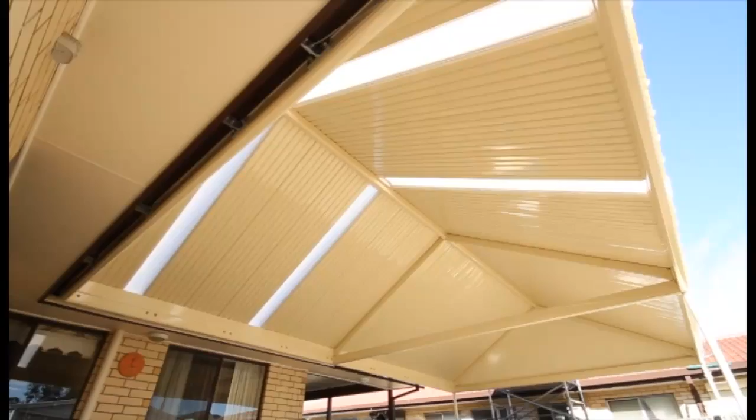The Stratco Outback is a complete portfolio of products that are tailored to your individual needs. Whether for entertaining, an area for children to play, or all year-round weather protection, a Stratco Outback will improve your lifestyle and the value of your home. This DVD provides assistance to help you install your Stratco Outback Clearspan gable with the fundamental information and some handy hints to help you along the way.

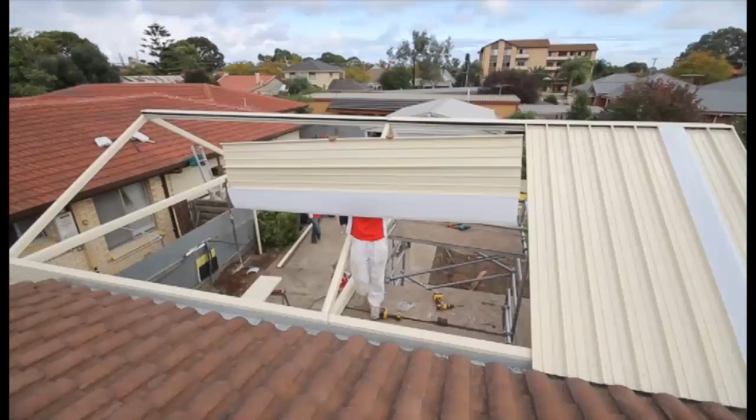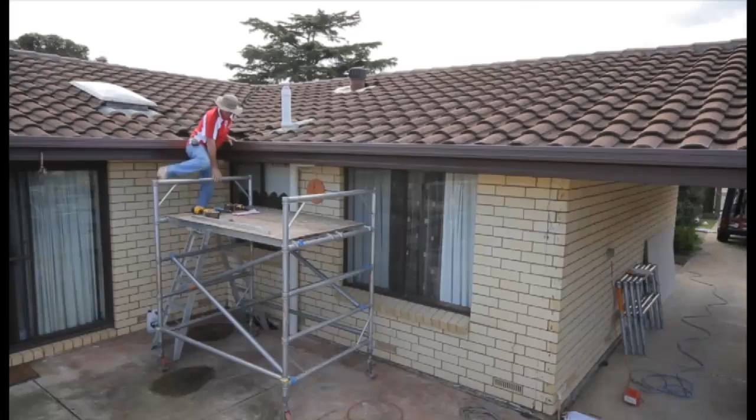Before you start, it's important to check with your local government authority prior to the installation of your Stratco Outback. It is the builder's responsibility to ensure any structure to which the Outback is being attached is capable of withstanding the additional loads and, if necessary, is adequately reinforced. This includes existing concrete to which the Outback is being attached.

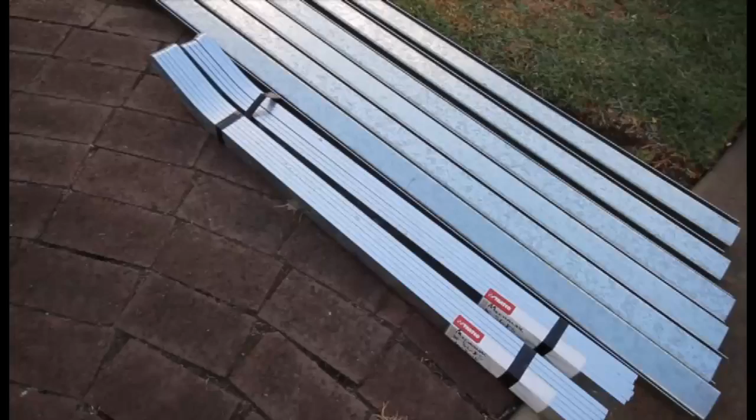Watch this DVD and read the installation guide in their entirety before starting your project, and refer to them constantly during construction. Lay out the components in order of assembly on the ground and check them against the delivery note to ensure you're familiar with them and ensure you have all the necessary tools.

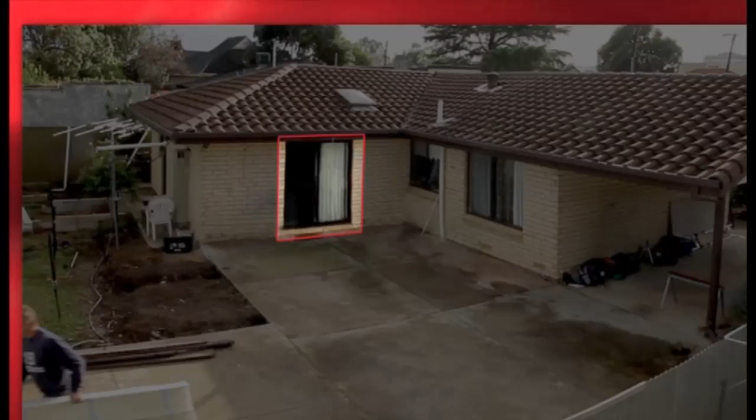Refer to your drawing of the Outback and house showing all measurements. Mark out the overall area of the Outback and ensure it's free from obstructions. Beam-to-wall connections can cause difficulty if they coincide with window or door openings, so try to avoid these in your design. Ensure there is reasonable access for materials and working space, and consider the disposal of runoff water.

Check post and beam positions on the ground and check for square by measuring diagonals. If attaching to a corner of a house, also check the existing structure for square.

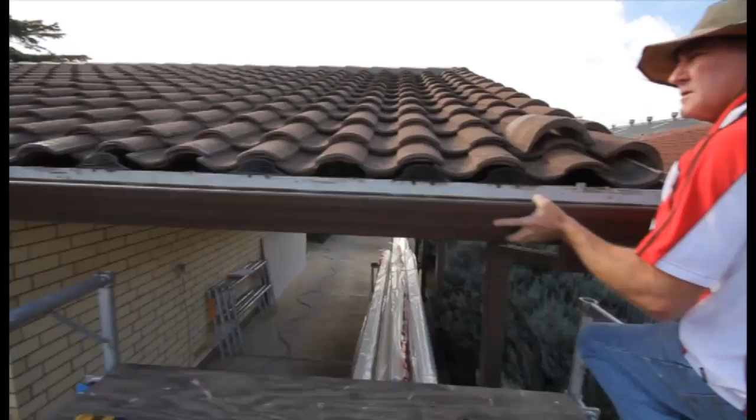Box gutter installation. Remove the existing house gutter where the box gutter will be installed. Consider how and where the box gutter will join to your existing house gutter and downpipe. Cut the box gutter and join to existing house gutter.

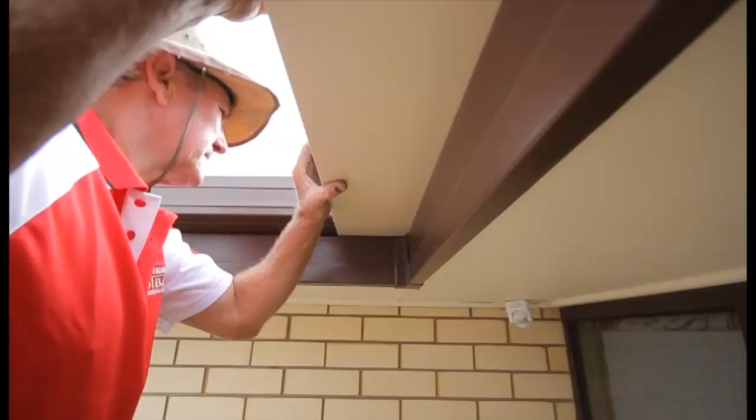Fix in place above your rafter strengthening brackets, joining it to existing house gutter and fascia. Measure the remaining length for the box gutter and cut. Seal all joins and rivets with silicone.

Rafter strengthening brackets. Rafter strengthening brackets need to be installed at maximum 1200 mm spacing. Prior to ordering the material, you should lift your existing house roof and locate your house rafters. Whilst there are several options for strengthening rafters, the recommended method is Stratco's adjustable rafter strengthening bracket.

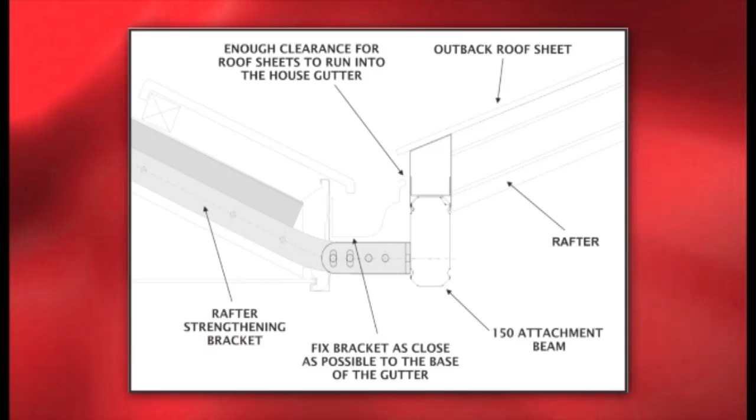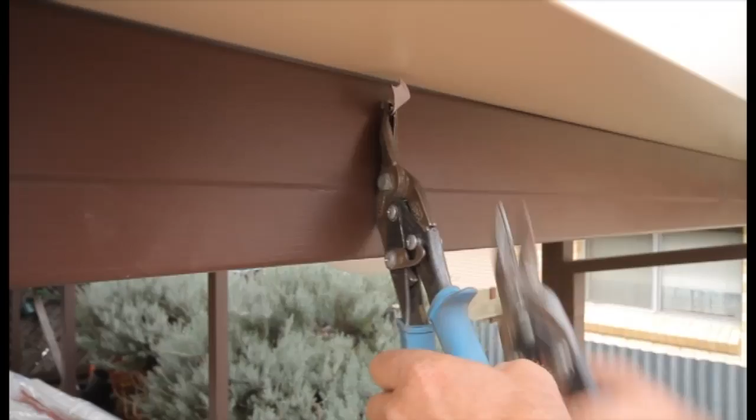The adjustable rafter strengthening bracket allows a greater distance between the house fascia and the Outback attachment beam to facilitate the installation of a box gutter. It consists of two pieces, the long arm and the T-piece. Cut a hole in the house fascia to allow the long arm of the bracket to protrude through. Slide the bracket through the fascia and position alongside the house rafters.

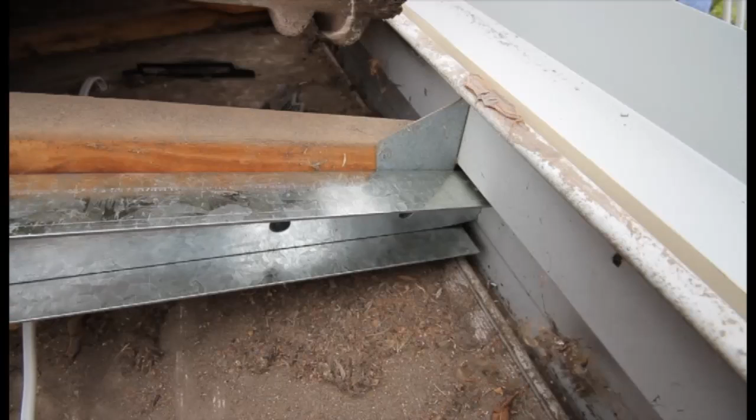To provide additional strength, a reinforcing channel may also be required on the opposite side of the rafter or on both sides. The reinforcing channel should extend to at least 1800 mm beyond the bird's mouth of the rafter and/or 300 mm past the web overhang of your house rafter. Bolt the long arm of the bracket to your house rafter using a minimum of 6 M12 bolts. These are not included in the standard Stratco Outback kit.

Fit the bracket as close to the bottom of your house gutter or box gutter as possible. Ensure the bolts go through the bracket, rafter and reinforcing channel if required. Contact Stratco for more information on steel framing reinforcement and attachment methods.

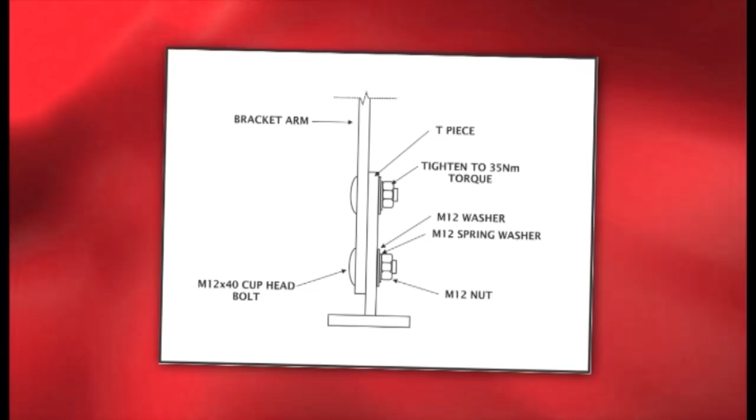Bolt the T-piece of the bracket to the long arm at the desired location. Ensure the front face of the bracket is vertical and is at the desired distance from the house fascia. As it is critical all brackets are even, run a string line to align the brackets. In the case of a corner attached unit, if the house is not square, this can be corrected by adjusting the brackets accordingly. Once rafter strengthening brackets are fixed, the Outback attachment beam can be prepared and then bolted in place.

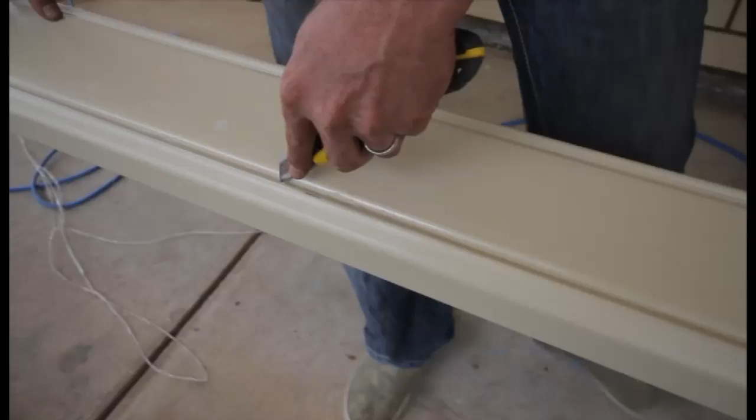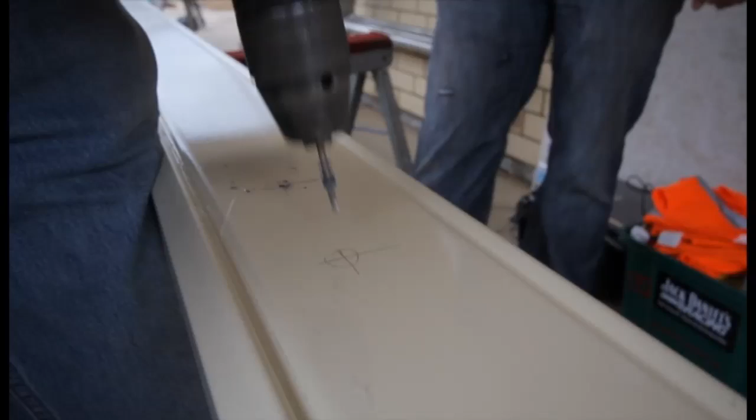Attachment beam preparation. Mark the desired hole locations. Drill a pilot hole and then a 10 mm hole right through the Outback beam in the same location. Then drill a 13 mm hole right through the Outback beam in the same location. Gradually widening the hole will ensure they will stay even either side.

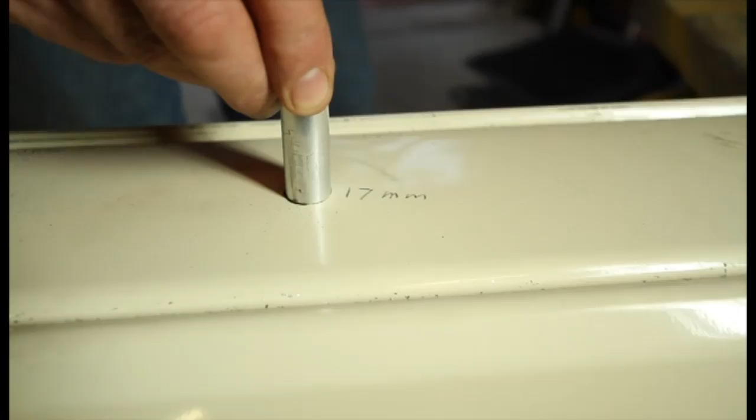Turn the beam over and drill a 17 mm hole on the inside face to allow for the insertion of the spacer. The spacer minimises any potential crushing of the beam when bolts are tightened. Remove any swarf. Attach the Clearspan beam capping to all side attachment beams before bolting it in place. End attachment beams do not require the beam capping.

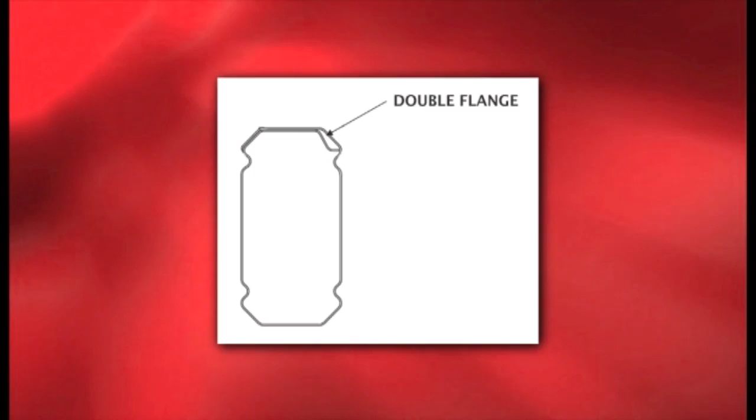Ensure the double thickness is at the top and the seam faces the house and the roof sheets will clear either the existing house gutter or box gutter. If a cover flashing is being installed to conceal the rafter strengthening brackets, it's preferable to line the bottom of the attachment beam up with the bottom of the house fascia, provided this allows water runoff into the house gutter or box gutter.

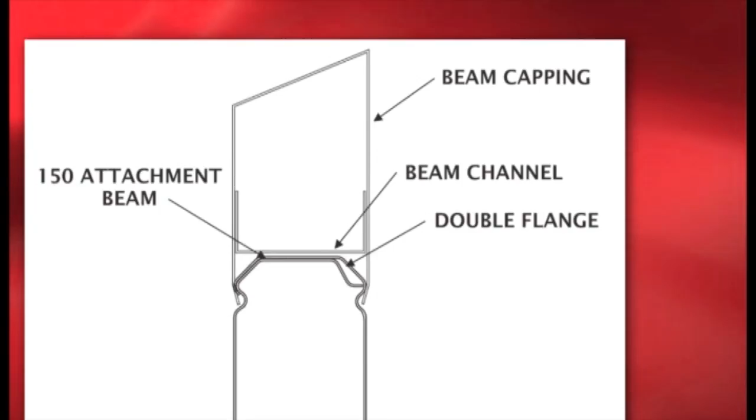Clearspan beam capping. Side beams or valley beams of Clearspan gables have a capping attached to them to provide additional strength and height. Measure the inside section and cut to length if required. Ensure that the two sides of the inside section remain flush with the faces of the beam.

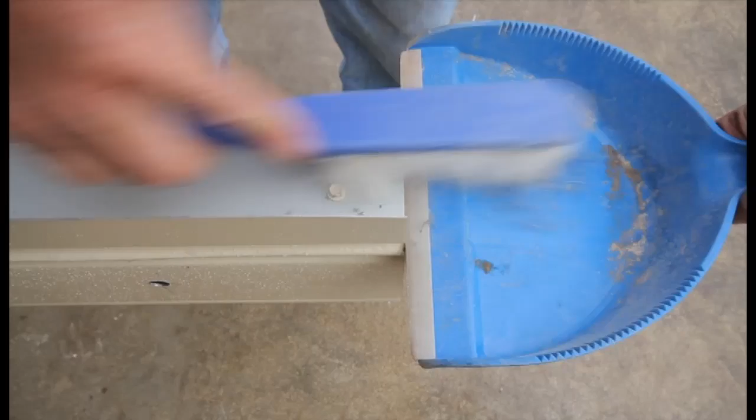Screw the inside section to the top of the beam with 12x20 self-drilling screws every 500 mm and no further than 100 mm from the end. Multiple lengths, if required, are butt joined. Remove any swarf. Measure the outside section and cut to length if required.

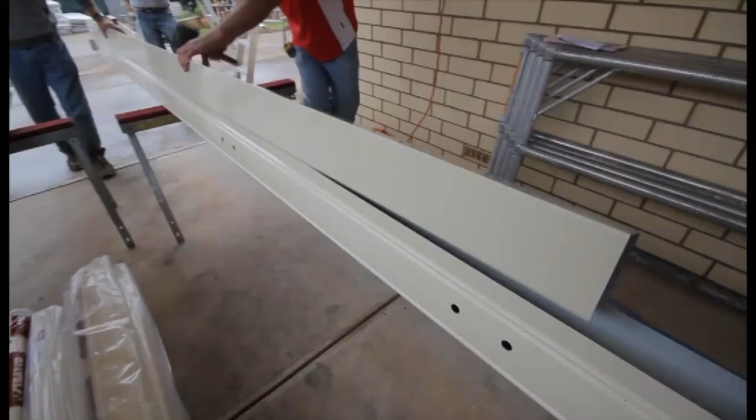Clip the outside section over the inside section at one end, ensuring the return fold sits inside the top flute of the beam, and fix with one self-drilling screw. Work along the length of the beam capping, gradually clipping the outside section over the inside section. The return folds on the bottom of the outside section nestle into the top flute of the Outback beam.

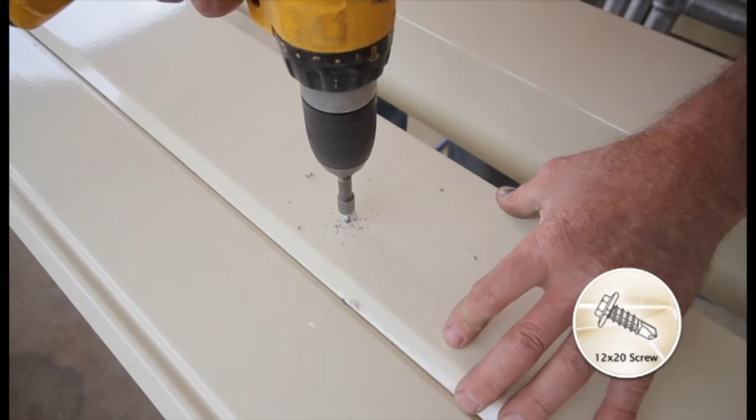Fix the outside section to the inside section using 3 mm rivets or 12x20 self-drilling screws every 500 mm. It will be necessary to notch the beam capping where other beams are connecting.

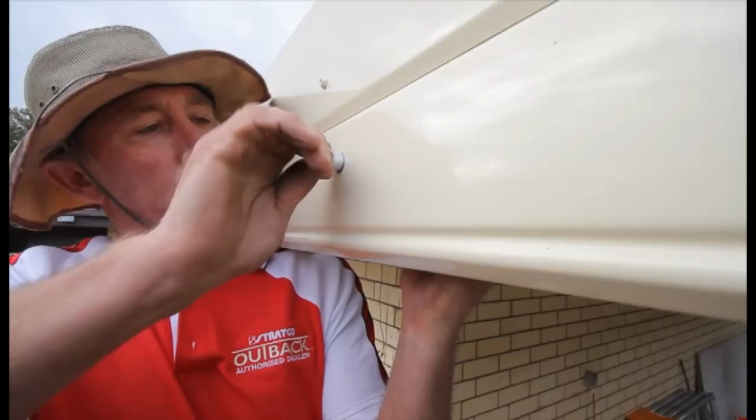Attachment beam installation. Lift the beam into place and insert spacer and bolt into attachment beam, and connect to rafter strengthening brackets, ensuring the bolt head and spring washer is on the inside face of the attachment beam. Hand tighten all bolts. Then, once all are in place, tighten but do not over-tighten bolts to avoid crushing the beam.

Where attachment beams are being joined to other perimeter beams, install a beam-to-beam bracket, and where posts are positioned, install a post-to-beam bracket.

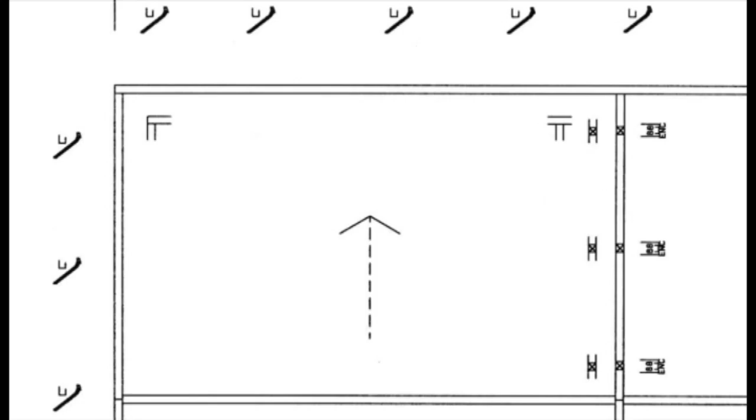Perimeter framework. Refer to the drawing to determine the orientation in which beams are being attached to each other and column location. Ensure the double thickness of the beams is to the top. Locate the beam-to-beam bracket on the inside face of the receiving beam where the beams will meet. Align the top of the bracket inside the top flute of the beam.

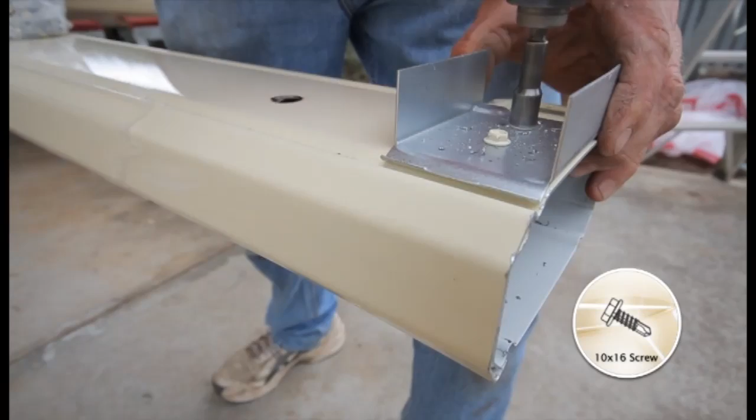Place a beam filler in the recess of the bracket and fix in place with two 10x16 self-drilling screws. If a column is to be connected below a beam-to-beam connection, use a notched beam filler and post-to-beam bracket. Slide the joining beam over the bracket and fix in place with two 10x16 self-drilling screws either side.

A post-to-beam bracket simply clips into place. Fix post-to-beam bracket with two 10x25 countersunk self-drilling screws each side. Where posts are located at a beam-to-beam junction, install both beam-to-beam and post-to-beam bracket with a notched beam filler. Repeat this process for all attachment beam, valley beam junctions and column locations until perimeter framework is completed.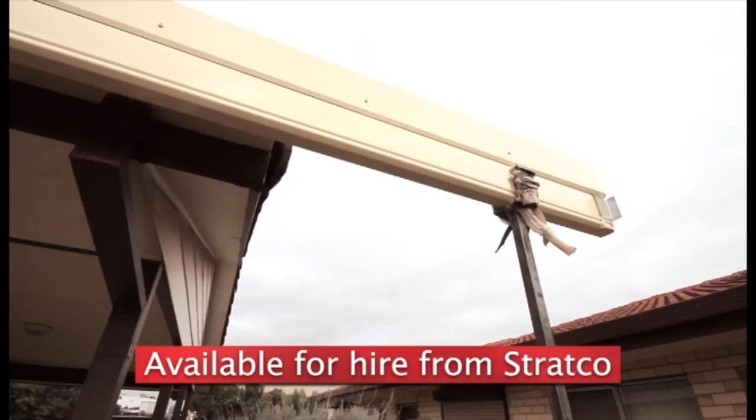A beam end cap is simply pushed into place to conceal the exposed ends of the beams. Be sure to use construction props during the framework installation to hold the framework in place and ensure they have a stable footing. Once all framework is installed, check for square by checking the diagonal measurements.

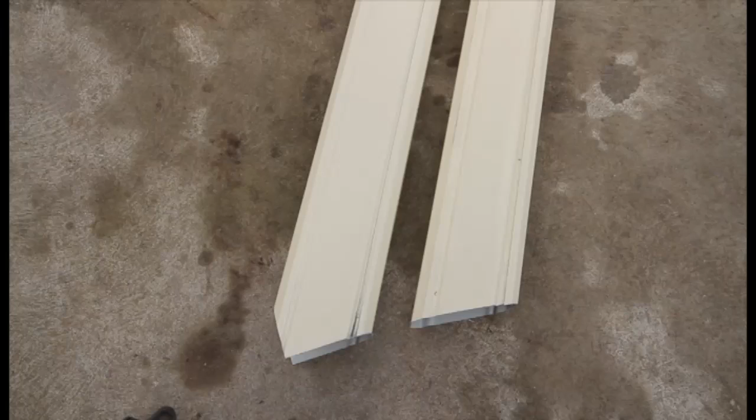Gable rafter installation. Gable rafters are supplied pre-cut to the required pitch and length. Identify the correct rafters using the cut detail at the base of the rafter. Intermediate rafters and rafters placed at the end of the structure with no header beam have a plumb cut, and rafters placed onto a header beam have a corner cut.

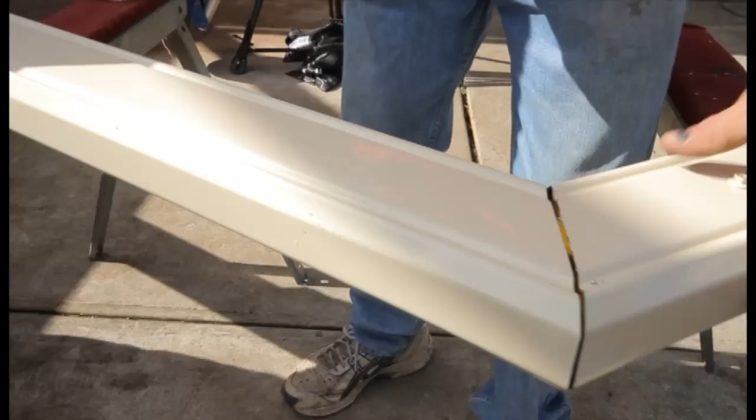Ensure the double thickness of the rafter is to the top and the seams are to the same side for both rafters. Slide the ridge knuckle into the top end of the rafters and check the overall width against your installed framework. Then fasten the rafters using two 12x20 self-drilling screws either side of the rafter.

Rafters where no header beam exists. Identify the location of internal rafters from your drawing. Measure along valley beams and mark desired location. Fix rafter to valley bracket using six 12x20 self-drilling screws to the Outback beam capping.

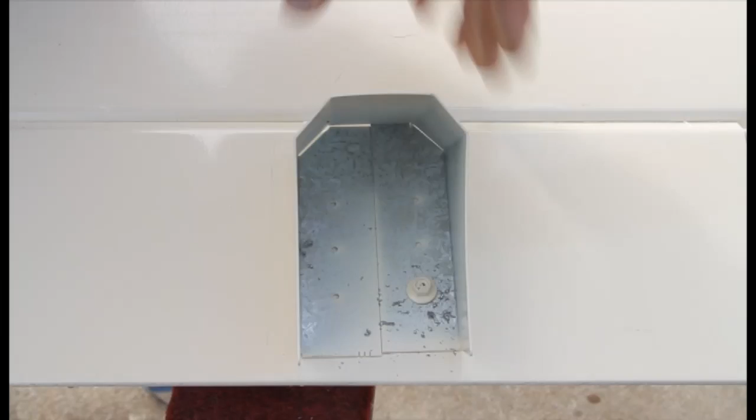Ensure the bottom of the rafter to valley bracket is in line with the bottom edge of the top groove of the Outback beam and remove any swarf. Insert the assembled rafters to the inside of the bracket and fix with two 12x20 self-drilling screws either side. Check the rafters are vertical.

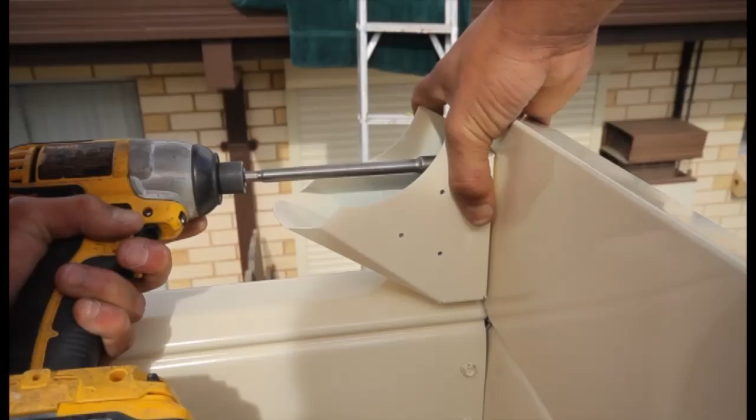Rafters attaching to a header beam. Fix gable beam bracket to the top of the header beam and side of the beam capping with a minimum of four 10x16 self-drilling screws. Insert rafter into the bracket and fix with a minimum of three 10x16 self-drilling screws. It may not be possible to gain a fixing on both sides of the rafter due to obstructions. Check the rafters are vertical.

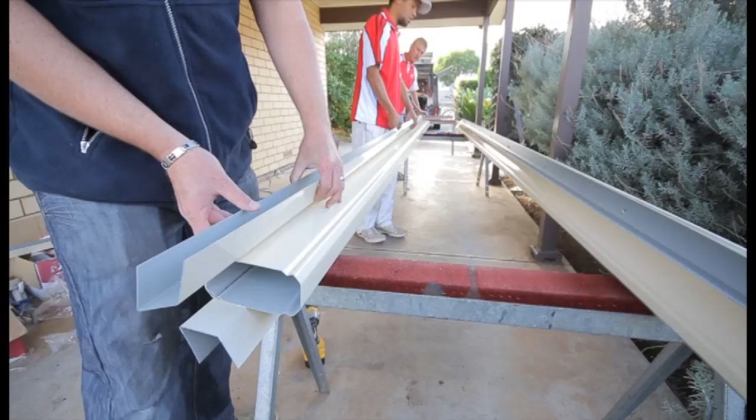Ridge beam assembly and installation. Before attaching the ridge beam to the rafters, fix angled back channel to either side of the ridge beam, using 10x16 self-drilling screws every 500 mm, ensuring that the top of the back channel is in line with the bottom of the top chamfer of the ridge beam. The back channel needs to run to the outside of the gable rafters.

If internal rafters exist, the angled back channel will need to be joined over these. If this is the case, run the angled back channel 34 mm past the end of either ridge beam at the internal rafter junction and butt join over the centre of the rafter. If only end rafters exist, run the angled back channel 68 mm past the end of the ridge beam both ends. Fasten along the top of the ridge beam with 12x20 self-drilling screws at 500 mm centres.

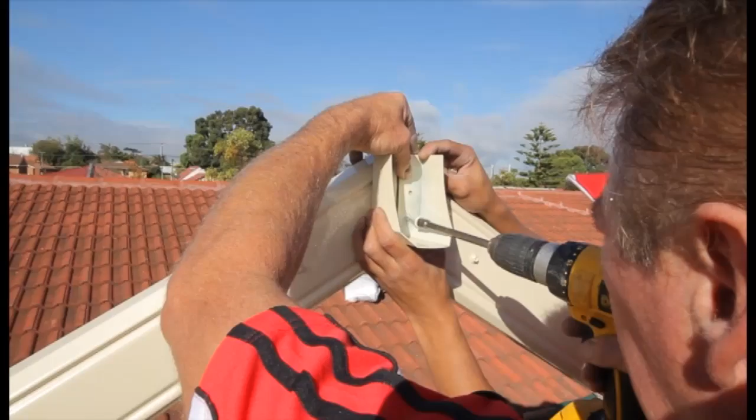Fix the ridge rafter bracket to the inside face of the rafters with 6 12x20 self-drilling screws. Position the bracket so the angled back channel will rest on the gable frame, which for a 22-degree pitch unit is 32 mm from the bottom of the rafter and 42 mm for a 30-degree pitch unit.

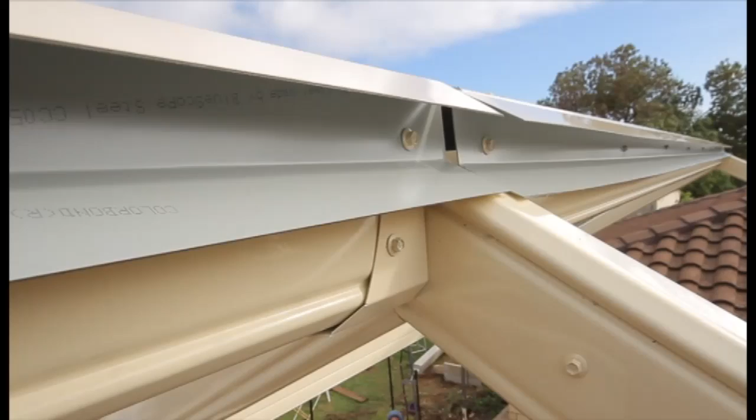Position the ridge beam inside the brackets and fix the ridge beam in place with 2 12x20 self-drilling screws either side into the ridge rafter bracket. The top screw may need to be fixed through the angled back channel. Roll the foam into the angled back channel and cut to length.

Gutter installation. The first step of gutter installation should be completed before roof sheets are installed. If the gutter requires a mitre to be fixed to it, cut the gutter and fix the mitre in position with 4 rivets.

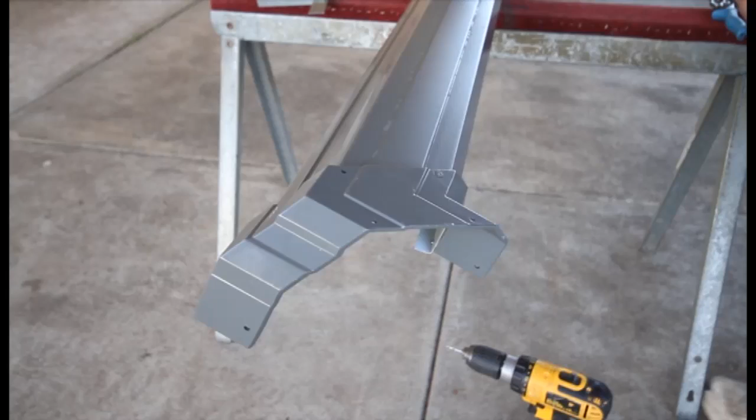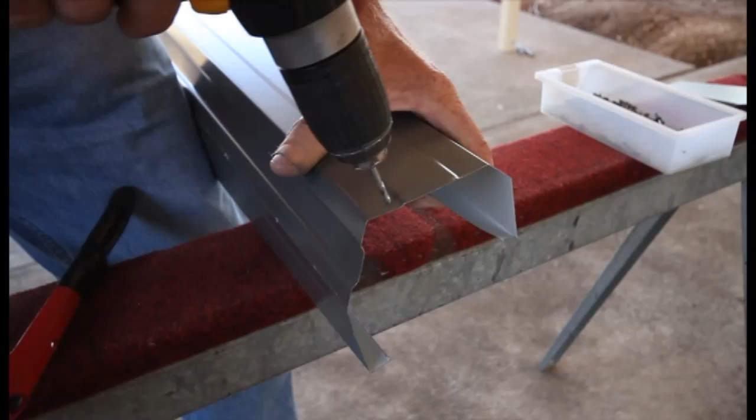Determine your downpipe location and cut a hole in the base of the gutter. Insert the downpipe outlet into the gutter. Rivet and seal with silicone. If the gutter requires a stop end to be fitted to it, fit the stop end with 4 rivets and seal with silicone.

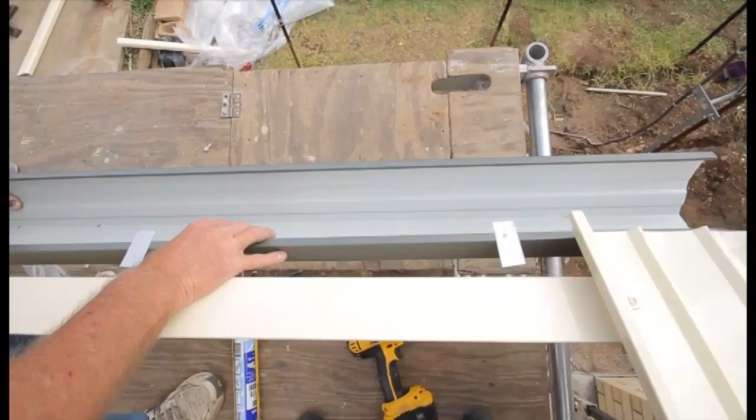Cut the supplied 30 mm wide flat strip to 60 mm long and rivet to the back lip of the Outback gutter. Lift the gutter into position and rivet the tabs to the Outback beam capping. Universal deck straps will hold the front of the gutter. Install these after the roof sheets are laid by pushing the strap into the gutter's front lip and fix to the ribs of the roof sheets with rivets.

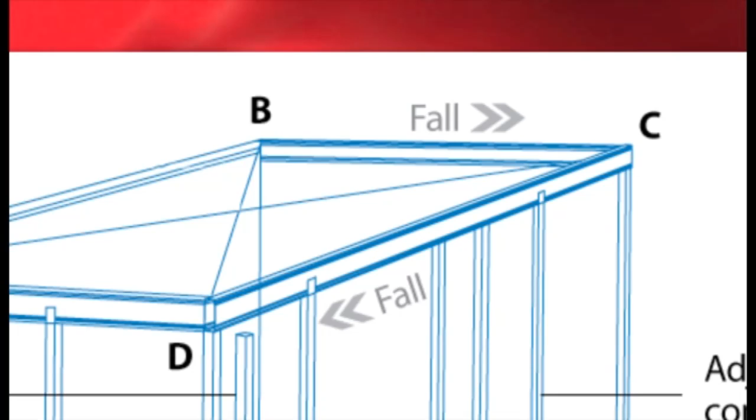Column assembly. Into concrete. Once framework is assembled and checked for square and the correct fall for gutter, which is 1 in 500, determine column locations. If the column is going into concrete, dig the hole to the required specifications and place a half brick in the bottom of the hole for stability. Measure from the underside of the Outback beam to the top of the brick and cut the column to length.

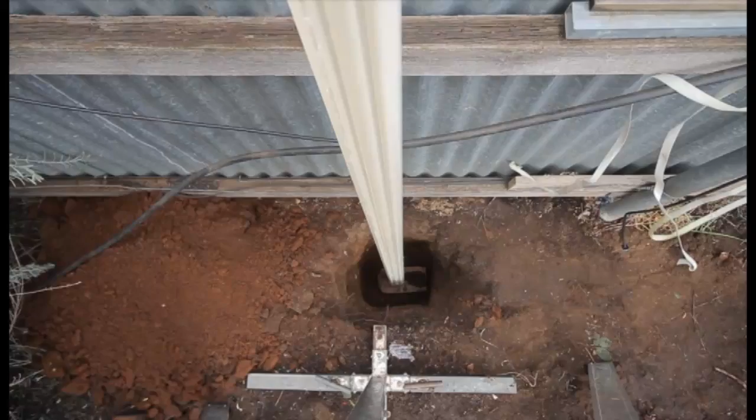Insert the cut end of the post into the footing with a bolt or self-drilling screw through the bottom of the post to provide an anchor to the concrete. Slide the Outback column onto the post to beam bracket and fix with 2 12x20 self-drilling screws either side. It may be necessary to lift the framework slightly to do this. Check the post for plumb and square.

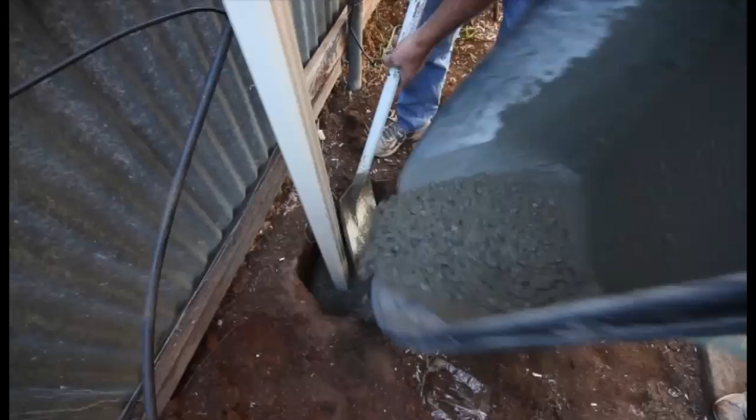Pour around 200 mm of concrete into the footing and agitate the concrete to remove any air pockets. Repeat this process until the footing is full. Continually check the post for plumb and square. Be sure to form the concrete so that it is slightly raised towards the column to ensure runoff away from the post. Once concrete is set, remove any bracing.

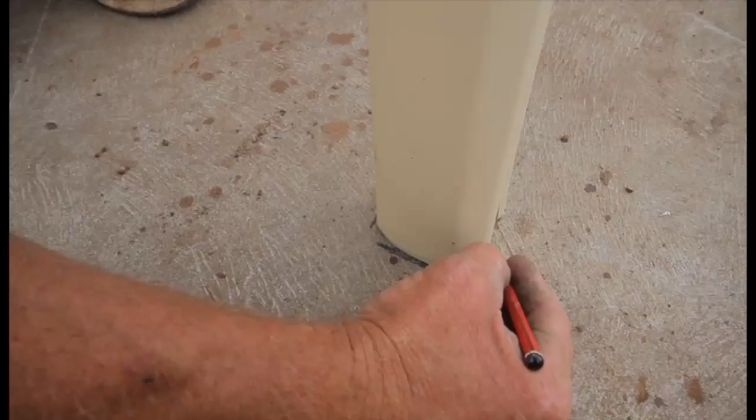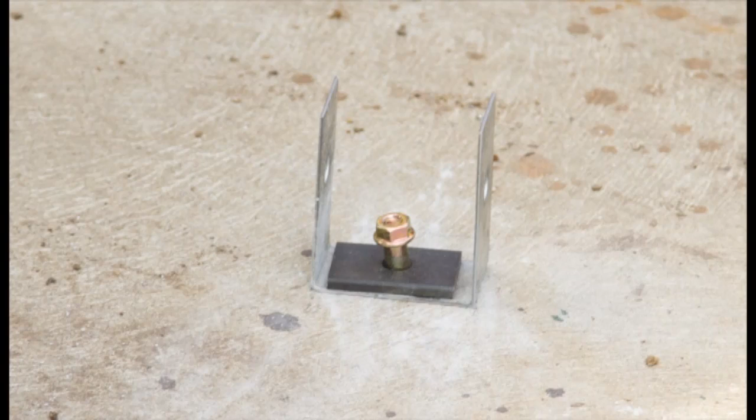On to concrete. If the post is going onto an existing concrete slab, determine column location and masonry anchor location. Measure from the underside of the beam to the concrete and cut to length. If using bolted footing assemblies, deduct 20 mm for the plate. The hole location into the slab will depend on whether you are using the bolted footing assembly or the internal footing upstand. Mark the hole locations on the slab and drill the required hole size and depth.

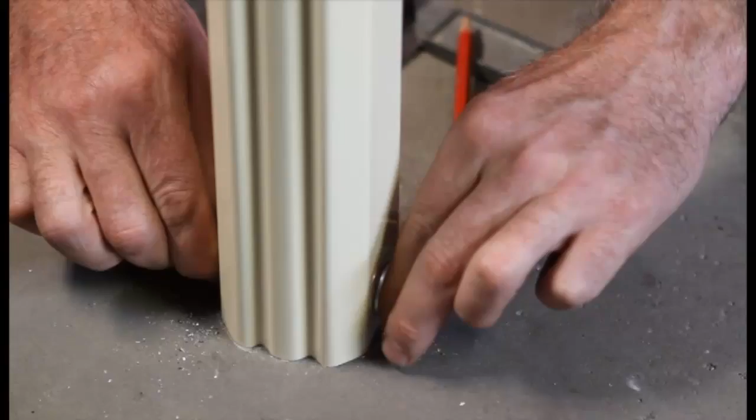Bolt the internal upstand to the slab with an M12 masonry anchor after inserting the 5 mm washer plate. Bolt the column to the upstand with an M12 bolt. When putting the bolted footing assembly together, be sure to put the bracing inside the upstand to provide rigidity. Mark the hole locations, drill the required diameter and depth, bolt into place with M12 masonry anchors,

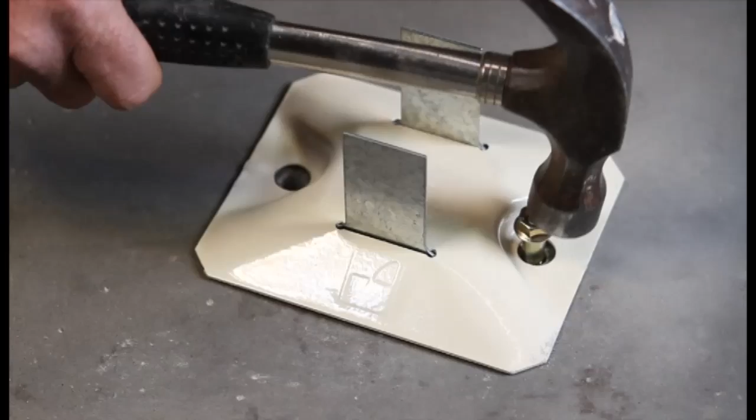slide the Outback column over the upstand, bolt in place and screw the post with two 12x20 self-drilling screws either side onto the upstand. It may be necessary to lift the framework to be able to do this. Fit the post caps with silicone.

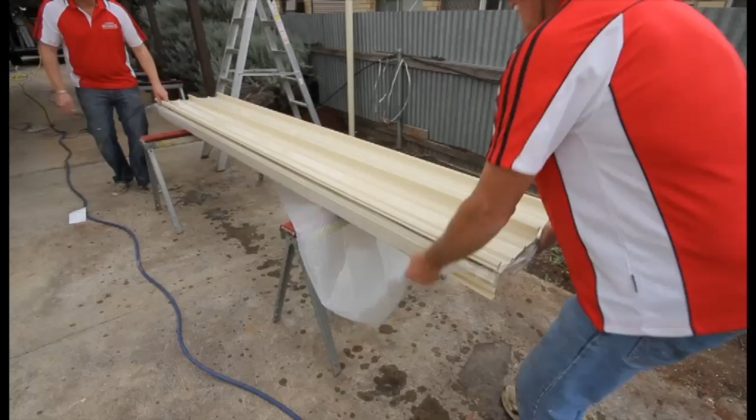Roof sheet installation. Determine which direction the roof sheets are to be laid and roof light location. Before installing the roof sheets, ensure you turn the roof sheet pan up into the angled back channel for weathering. Push the first sheet into the back channel at the top of the gable. Ensure it engages the foam.

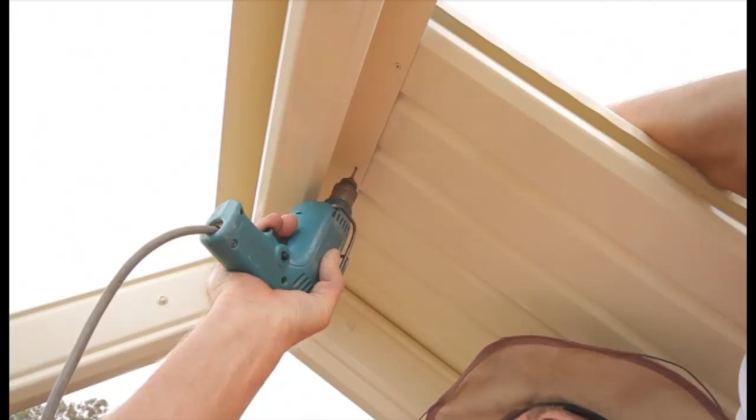Check for square and drill through the back channel and roof sheet from the underneath with a drill bit and rivet the sheets in place. There should be 2 rivets per pan per sheet. Fix the roof sheet to the beam capping with 4 12x20 self-drilling screws with neo washer in the same fixing pattern as the rivets.

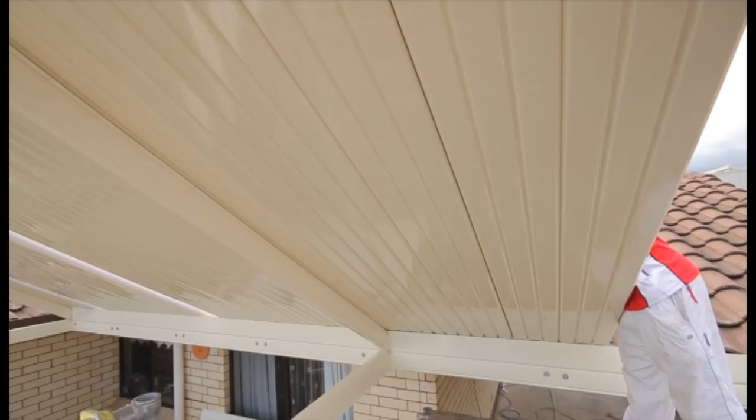Clip the next sheet over the rib of the first sheet by pressing firmly on the second sheet until it engages the underlap of the first sheet. It may be necessary to support the join from the underside, especially for longer length sheets. It is recommended to clamp the roof sheets from the top to minimise any gaps created on the underside where the sheets join. Push into the back channel and fasten as previously described.

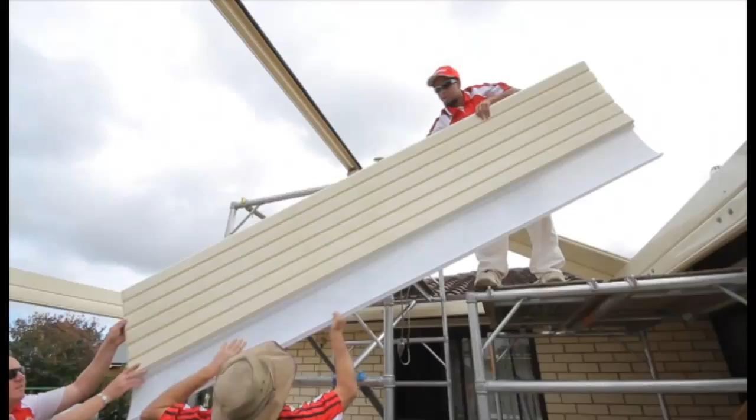After installing every second sheet, check for square by measuring the distance covered or distance remaining at the top and bottom of the gable section. Continue this process until all sheets are laid. Be mindful where any roof lights are going to be installed. Leave a 250 mm gap if roof lights can be slid into place. Depending on the length of the unit, the last roof sheet may need to be cut to suit your project. Install universal gutter straps to the ribs of the roof sheets no further than 1000 mm apart.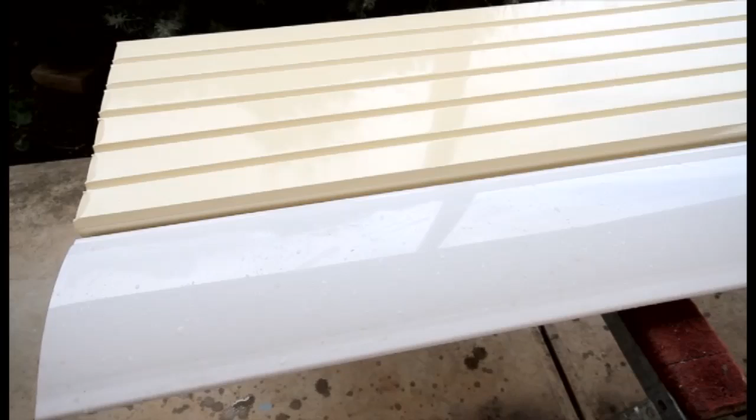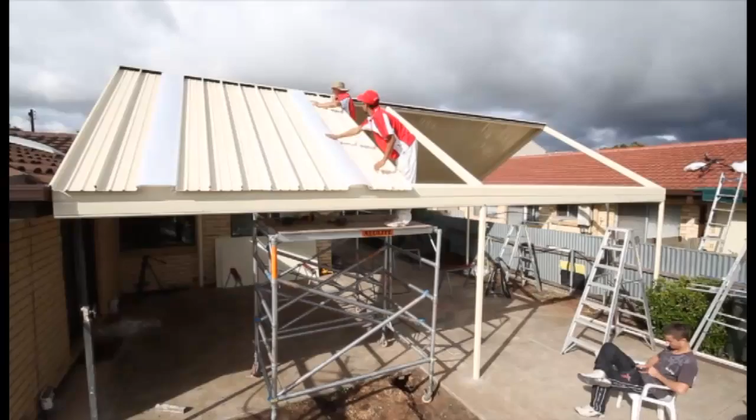Roof light installation. Roof lights are supplied in stock lengths and as such need to be cut to the required length. Check the total quantity and length of roof lights against the stock lengths supplied to ensure the correct lengths are used. Cut the roof light to the required length. Roof lights can be slid into place. Where this is not possible due to the house attachment, slide the roof light to the overlap of the roof sheet and lift both sheets into position and clip the roof light onto the already installed steel roof sheet.

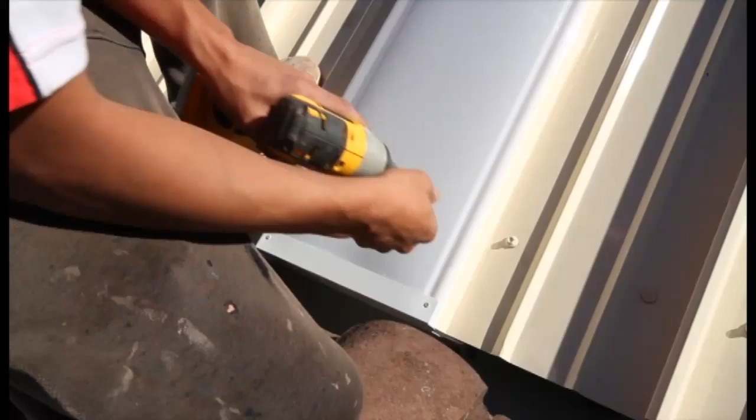If the roof lights can be slid into place, install the steel roof sheets and leave a 250 mm gap for the roof light and slide into position. Ensure the roof light pushes into the foam in the back channel. 9 mm holes must be pre-drilled and then fix to the steel sheets using 12 by 20 self-drilling screws with dome washers every 2000 mil.

Push the foam insert into the back channel at the apex of the structure and fit the steel stop end into the bottom of the sheet with rivets. Seal rivets with silicone. It may be necessary to slightly trim the overlap of the steel sheet to enable the roof light to slide easily onto the steel sheet.

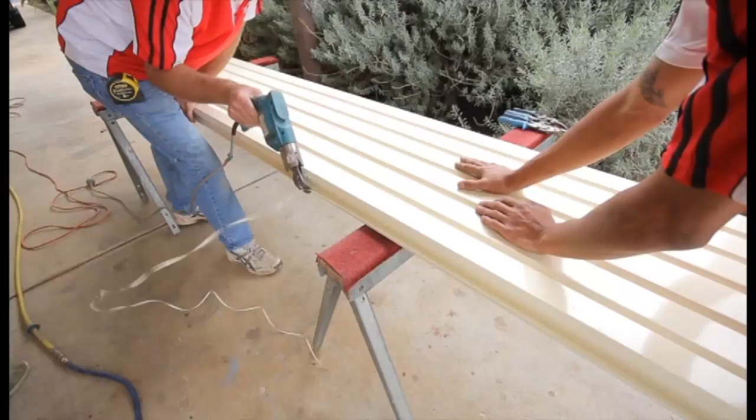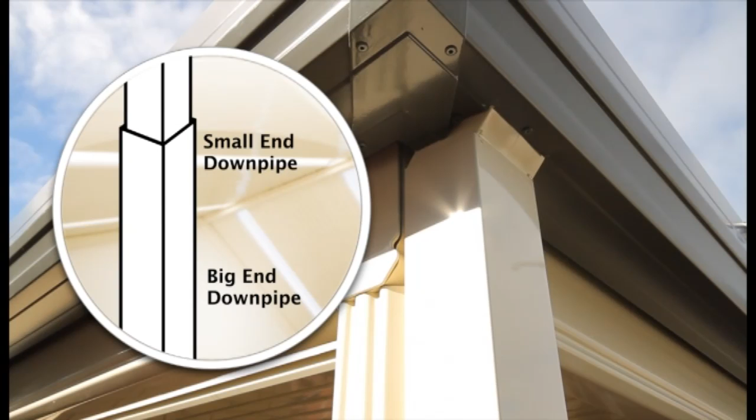Downpipe installation. Measure the required length of downpipe and cut the second section to length. Install the first length by sliding the downpipe over the outlet and riveting in place. Slide the small end of one downpipe into the big end of the other and rivet in place. Attach the downpipe to the column with the downpipe strap.

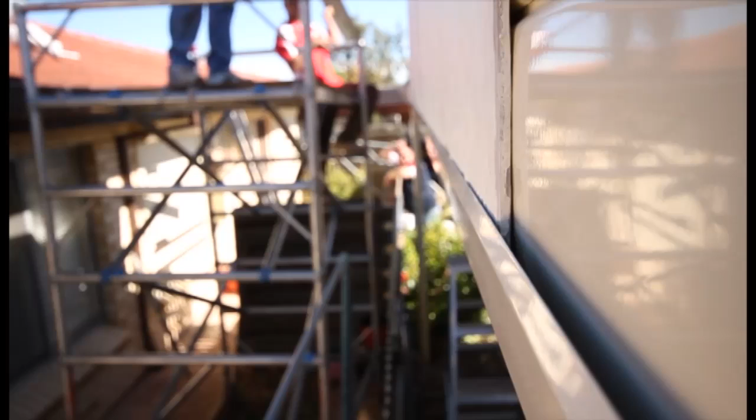Header beam flashing. Measure and cut the header flashing and fix in place. Leave a gap between the header flashing and header beam to allow the infill panel to be slid into the flashing. Cut the header flashing around any obstructions, such as columns.

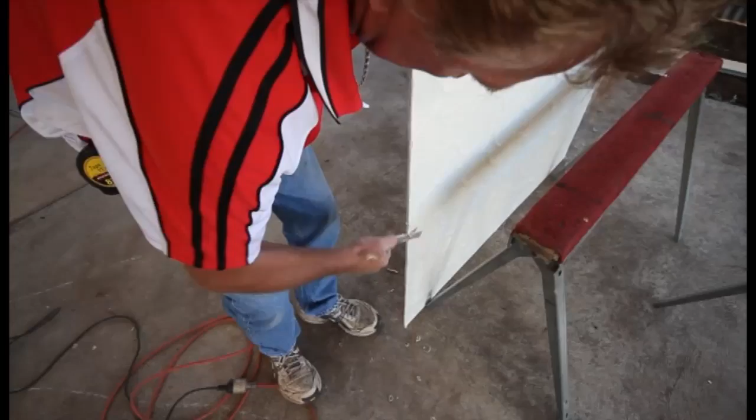Gable infill installation. Determine the orientation of the infill panels, horizontal, vertical, or a combination of both. Consider the use of offcuts on both gable ends. Cut the material to the required angle and size. If using painted fibre cement sheet, it may be necessary to use a utility knife to reduce the width to allow the panel to sit inside the H mould joiner.

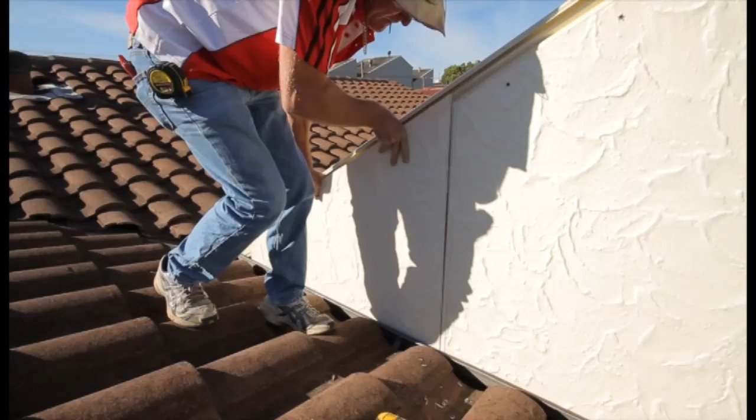Lift the first infill panel into place, check for square, and fix to the gable rafters. Slide the next infill panel onto the first using the joiners supplied. Fix the second infill to the gable rafters.

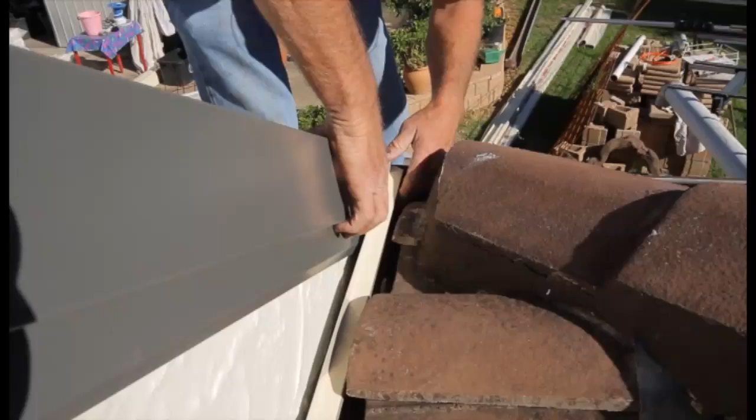Barge cap. Measure and cut the barge caps to the required length. Overlap the barges at the apex and fix in position to the rafters, angled back channel and roof sheets. Cut the Z flashing to the required length, slide under the barge cap and seal with silicone. Ridge cap. Measure and cut the ridge cap to length. Fix to the angled back channel and barge caps every 500 mil.

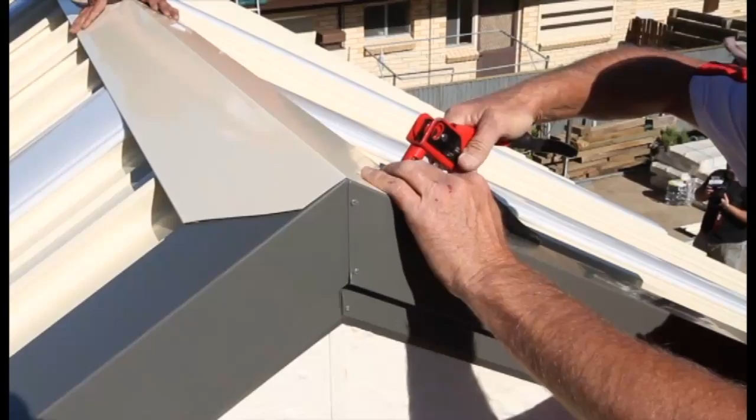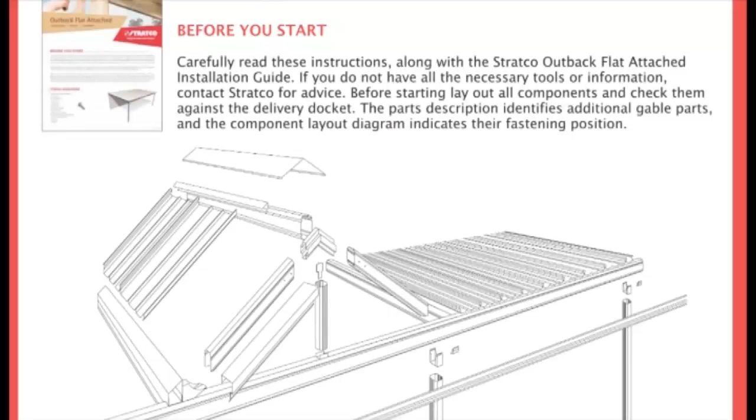Helpful hints. During installation, leave as much plastic coating on the product as possible to minimise the potential for damage or scratches. Always double check all dimensions and bracket locations against the plan. Refer to all supplementary information available, such as written installation guides, displays and other installation DVDs to assist in the installation. Always use a set square to mark required cuts. Always seal any exposed rivets with silicone.

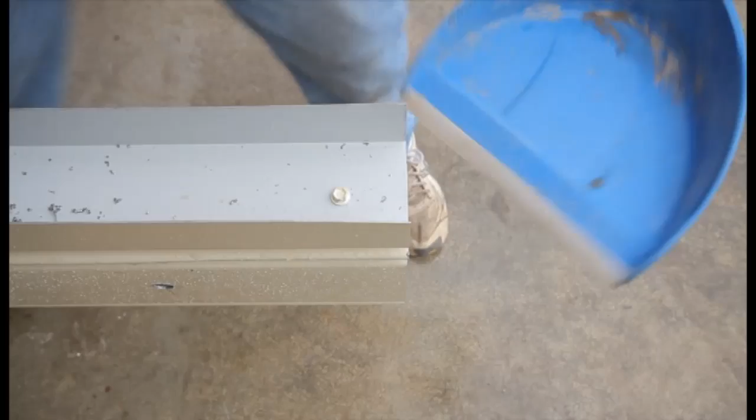Sweep the roof and clean the gutters at the completion of the project to remove all swarf, as this can cause unsightly rust stains. Regularly check framework and roof sheets for square. Leave all construction props in place until concrete has set or posts are fixed to the slab. Always keep personal safety as a top priority during the installation of a Stratco Outback. If at any time you require assistance or clarification during the installation of your Stratco Outback, please do not hesitate to contact your local Stratco office.

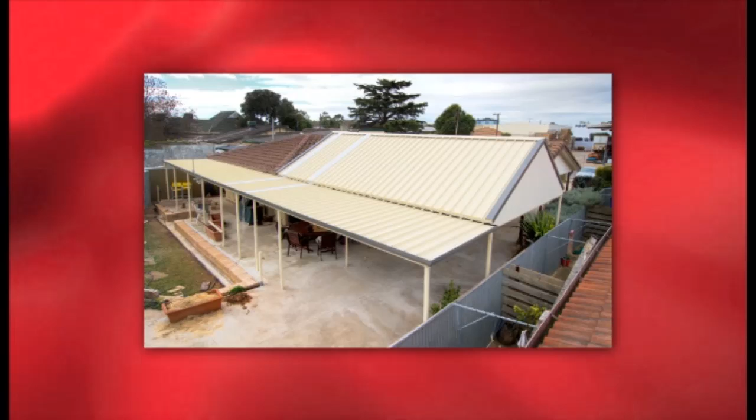Maintenance. Congratulations on the completion of your new Stratco Outback Clearspan gable. Your sense of pride and achievement is well deserved. Your Stratco Outback will give you and your family many years of enjoyment by simply following the important recommendations as laid out in the Stratco Selection, Use and Maintenance brochure. We recommend you wash and wipe down your Stratco Outback with a soft broom, mop or sponge as often as you would wash your car to maintain its decor. More frequent rinsing and cleaning may be required in more severe environments.